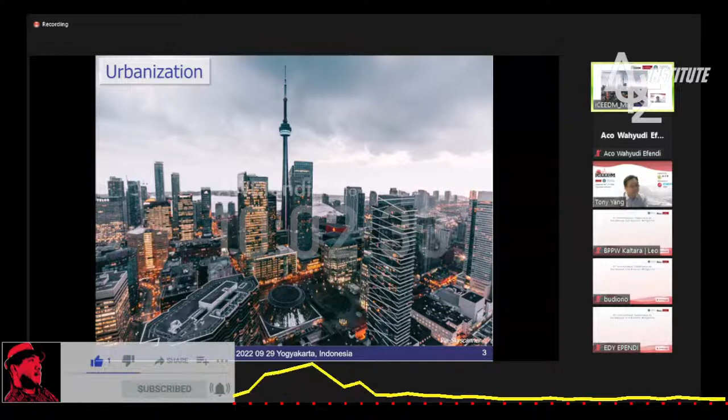My apologies, I'm seeing quite a delay in terms of speed. Is it from the internet, from your side, or too many people on Zoom? Whatever I'm sharing isn't immediately shared with you, not sure why. Are you still seeing the picture of Toronto? Yeah, I could see the city and also the bridge. Yeah, so it's very strange. Oh, you can see the city with the bridge. Okay, so this is Vancouver then, finally.

With so much population growth worldwide, we're expecting to see a lot of new infrastructure needed to be built. It is expected about 2.1 trillion square feet of new construction will need to be built by 2050.

For many of us, we don't really use the unit of trillion square feet. Just so you know, Jakarta is about 800 square kilometers, and Singapore is about 700 square kilometers. So 2.1 trillion square feet means we need to rebuild or build 9 Singapores every year around the world for the next 30 years. So there's a lot of construction that needs to be built.

And these constructions are creating global warming worldwide.

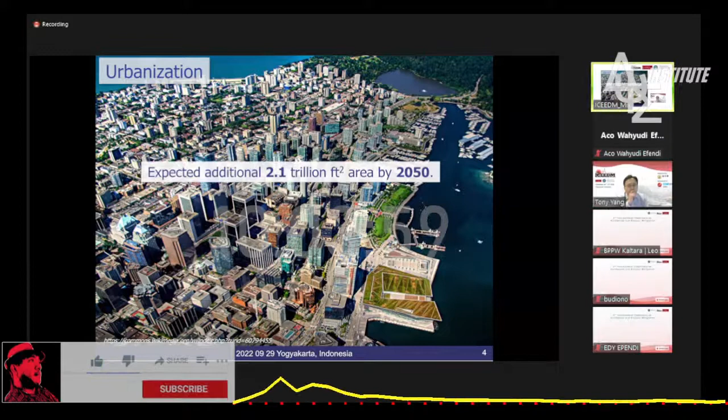I'm going to pause a little bit because it seems like the presentation slide showing up in your conference is slow by a few seconds. I don't know why. I think you're still seeing a picture with the City of Vancouver, right? It's already changed, yeah. You can see it now.

Now you can see the whole world is seeing huge carbon emission growth. You can see United States, China, and actually Indonesia with high production of carbon emissions. These carbon emissions are causing global warming and it's causing issues—we see forest fires, we see a rise in seawater levels.

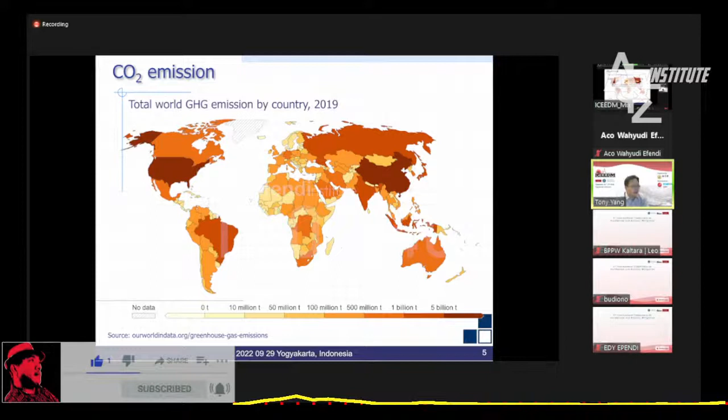So many countries have decided to work together in achieving greenhouse gas emission net zero by 2050. In order for us to achieve net zero by 2050, by year 2030 we need to start cutting carbon emissions by 30%. If we don't do that, part of...

will be under water. In addition to new builds, in addition to the carbon impact caused by that, we are seeing our existing infrastructure in North America deteriorating very fast. Right now, based on our initial research, it costs about 141 billion Canadian dollars to actually replace existing infrastructure rated very poor—we cannot reuse them again. And we need another injection of $11 trillion

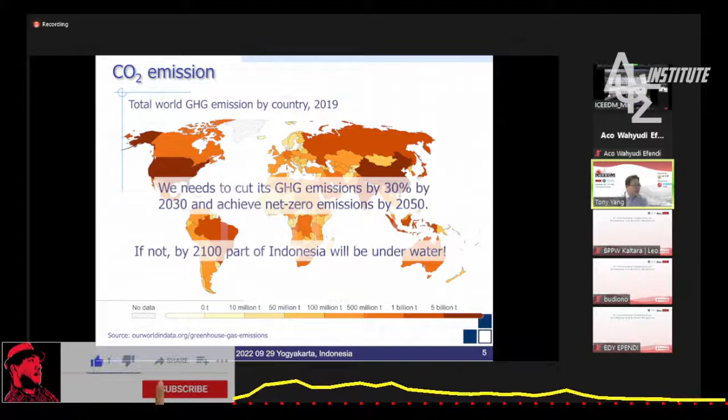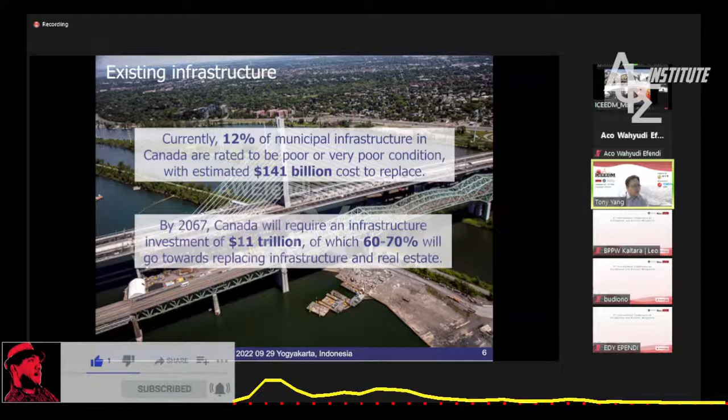for new population growth. In addition to this population growth and maintaining infrastructure, we're also seeing our infrastructure experiencing a lot of financial losses through natural disasters—earthquake, windstorm, fire, flood. We see this all the time.

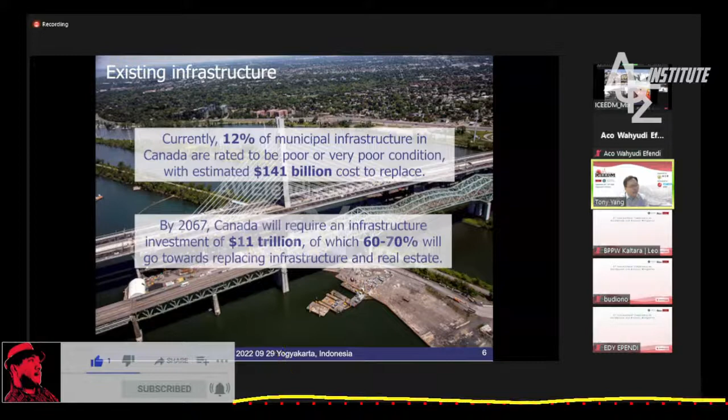Within the period between 1998 to 2017, less than 20 years, globally, loss for infrastructure reached close to $3 trillion US.

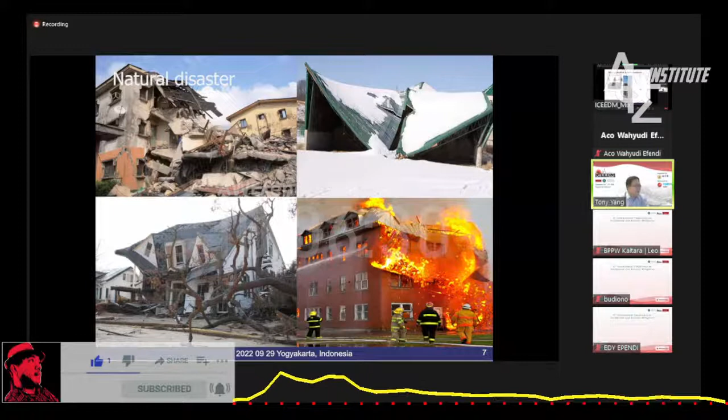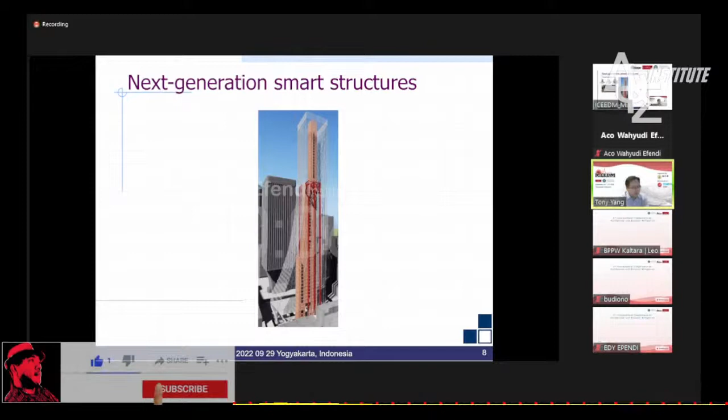So the next generation infrastructure that we're focusing on developing uses new ways of construction. We pre-make those in a factory and quickly assemble on site. We're developing 3D printing technology, reusing material, and using mass timber material to reduce the carbon intensity of new infrastructure.

At the same time, we want to make sure those infrastructures have all the technology we can to make sure they are safe for the next round of earthquakes. So we started developing energy dissipation devices. Finally, we use real-time monitoring, so the next generation infrastructures are smarter, carbon neutral, and resilient.

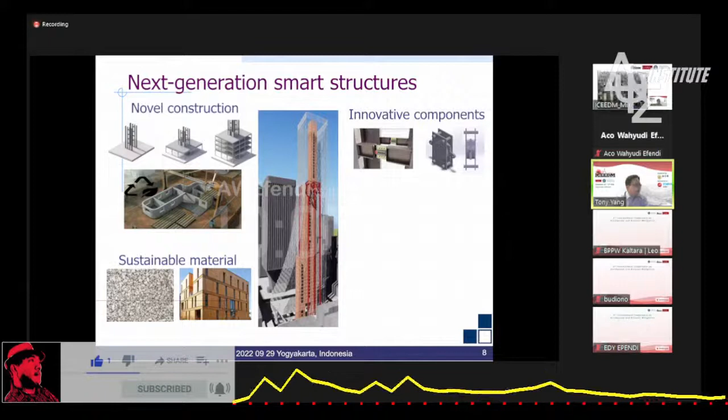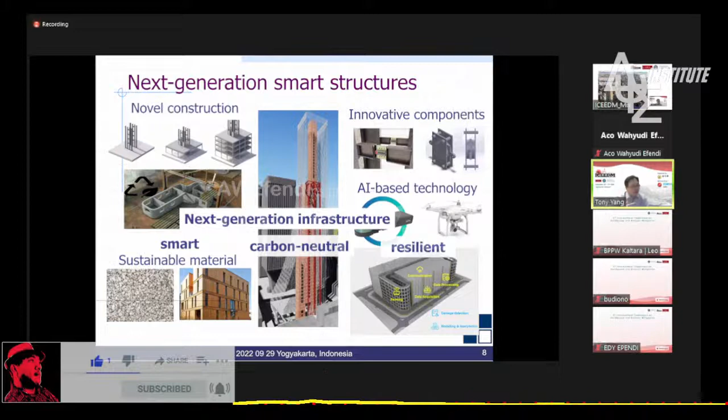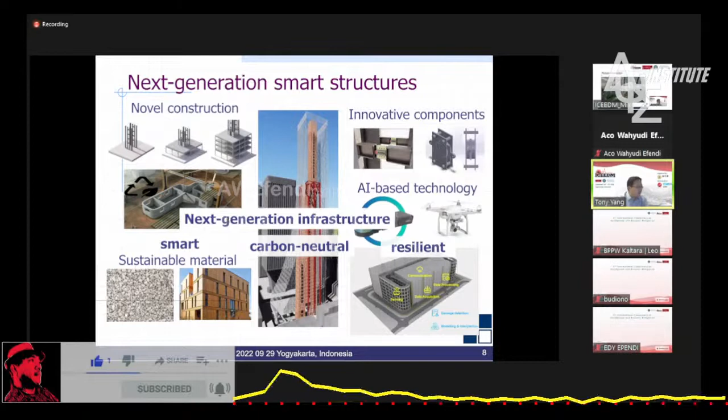So over the last 20 plus years, the world started developing newer ways of building faster to meet global demand. This is a video showing you the technology.

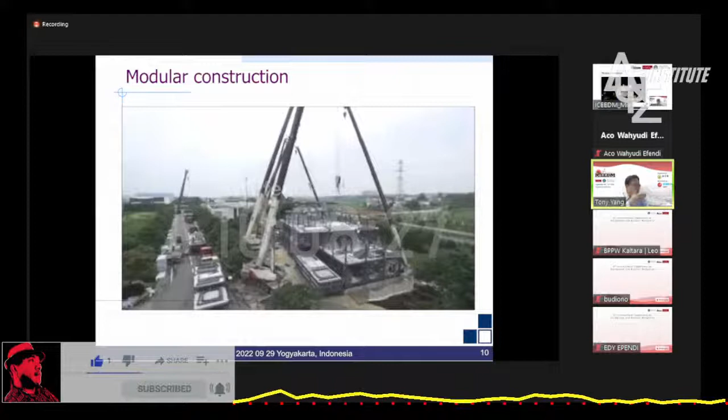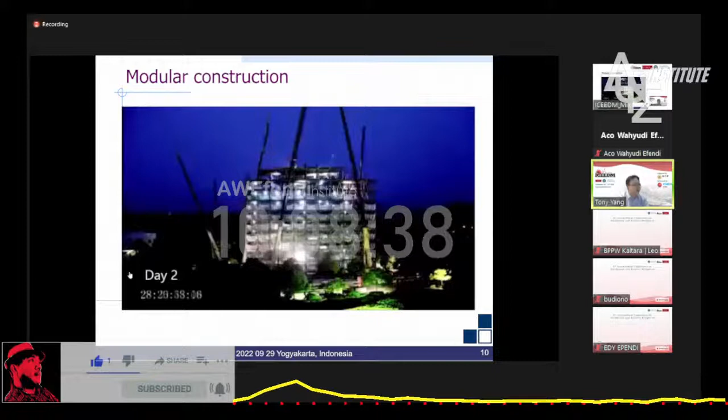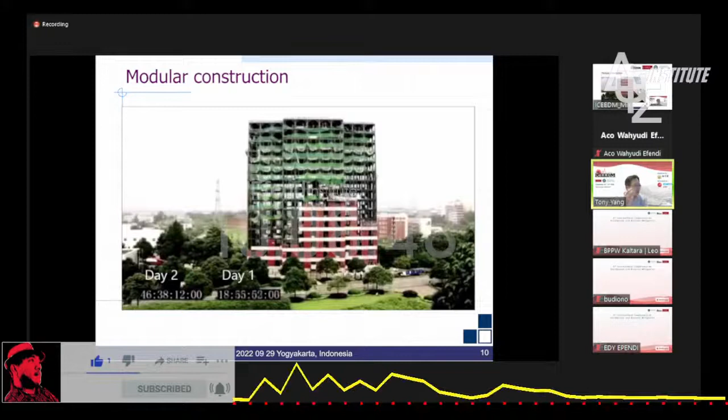Design and assemble the structures together. This is a real-time video showing how fast construction can be built. This is a 15-story building built within 2 days, less than 46 hours—all structural and non-structural components are assembled, the lights are turned on, the water is running, and the furniture is put in.

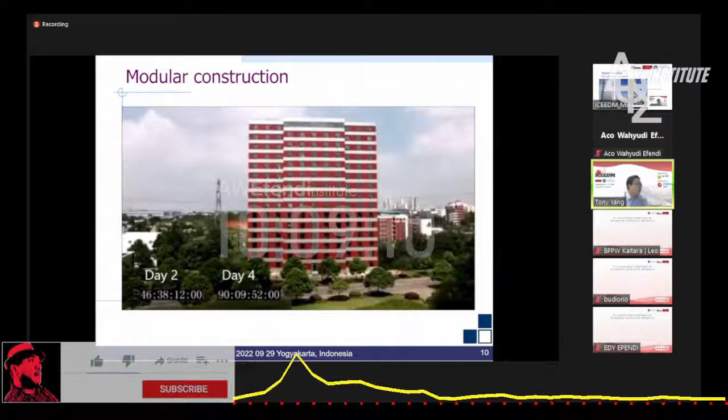This kind of new technology is being heavily investigated around the world. In fact, in China, they are thinking of building the next tallest building in the world, a 220-story structure, using fast construction technology. Right now in China, for modular construction technology, if you don't use it, you may not be able to get a permit to build in a city like Shanghai or Beijing.

So in North America, we're developing fast construction technology. Buckling-restrained knee brace truss moment frame is one of the technologies that we have collaborated on with colleagues around the world. The idea is to use truss systems in regions to create large interior spacing.

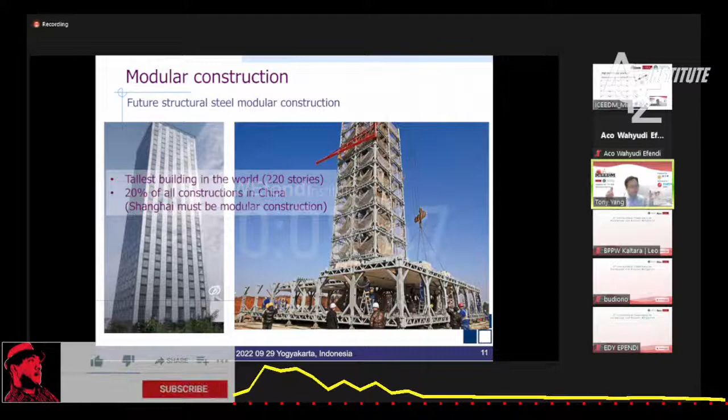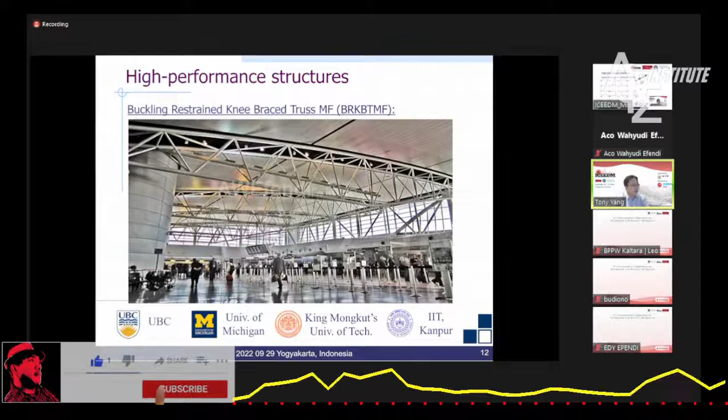To ensure it performs well for earthquakes, we started developing energy dissipation devices to dissipate energy, and we have secondary devices to dissipate additional energy. In the laboratory, we tested many of those devices, and we're working with Star Seismic, now called Brace, to develop those damper technologies.

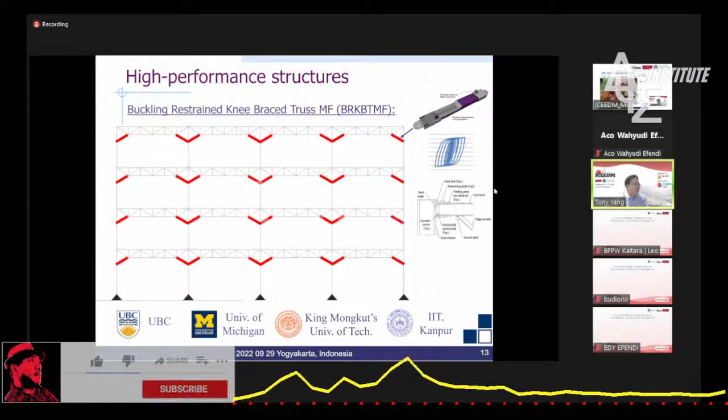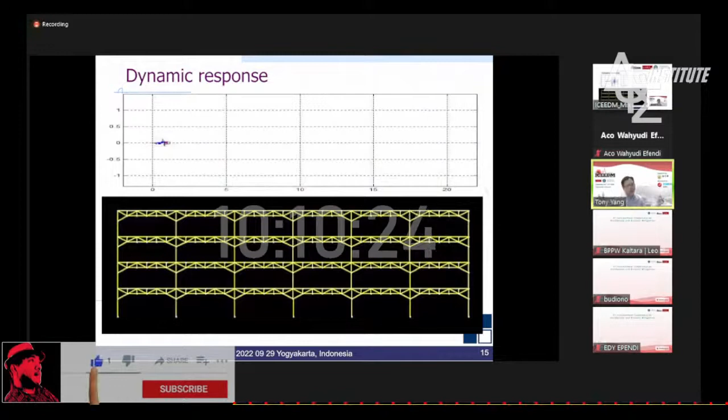We developed a simulation model to demonstrate that the structure can work well during storms and earthquake shaking, so the device can yield and dissipate energy throughout strong earthquake shaking.

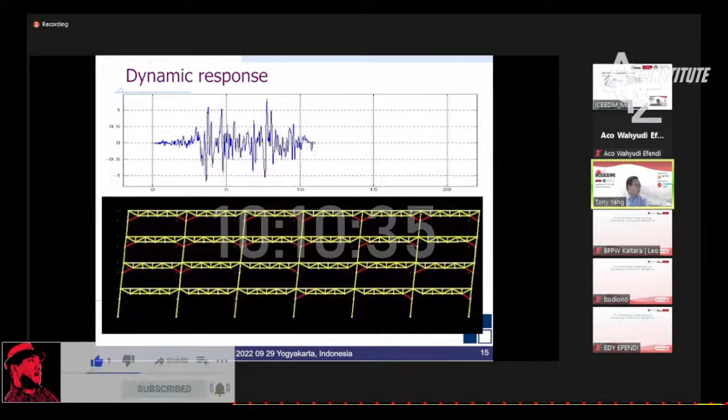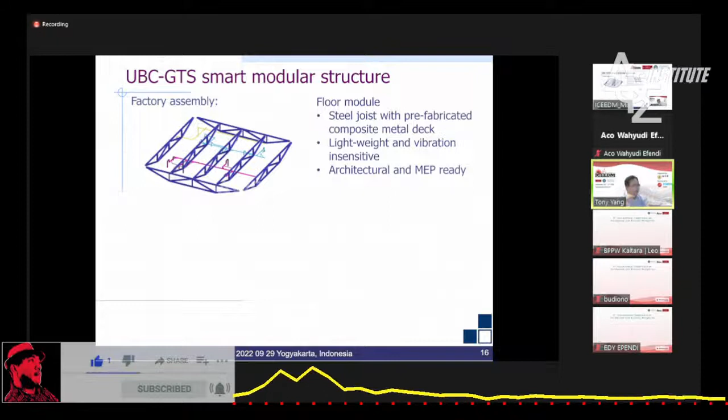After it's done in numerical simulation and experimental testing, the structural system is placed. All the electrical, mechanical, and plumbing systems are put in at the factory. We put in the floor, fire coating, sound insulation, and fire coating on top.

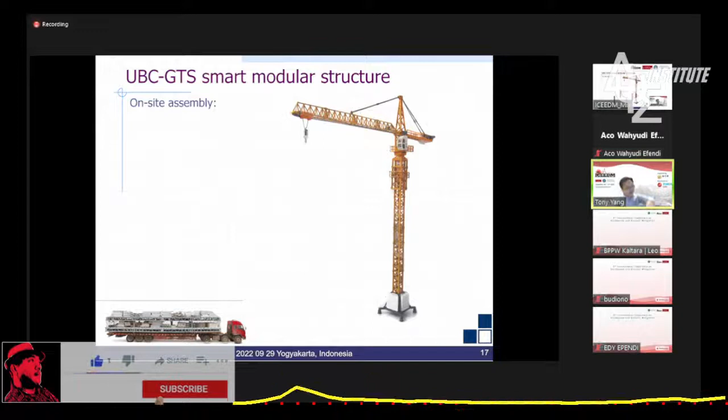Then we can easily ship it to the site. On site, we can quickly place it using a very limited amount of crane and human labor, then place those columns and lift the floor to place, making sure it works for high seismic zones like Indonesia and Vancouver. We started putting in these energy dissipation devices.

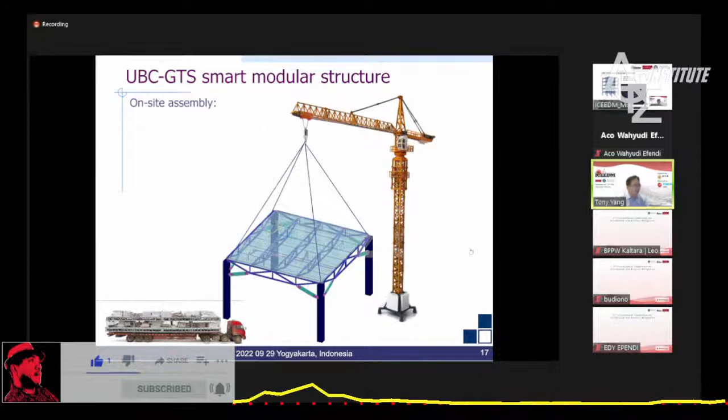The structure system can be very quickly constructed using very limited human labor. The system is very lightweight, very fast to construct, and earthquake resilient, so we can easily deploy it to many locations around the world.

The system can be placed in groups of modules and assembled together, and we can create very large open spaces, no different from this rendering shown on the slides.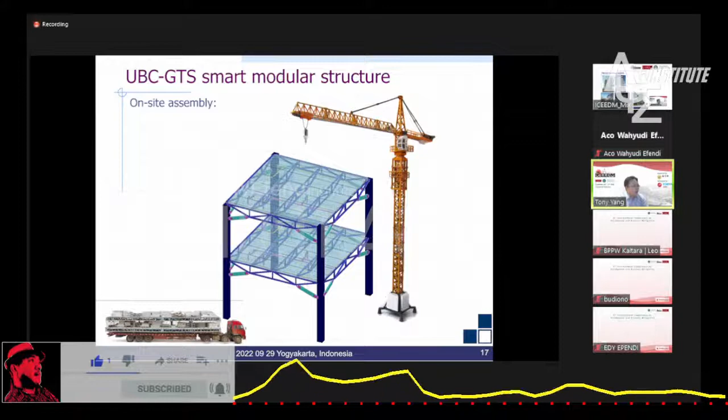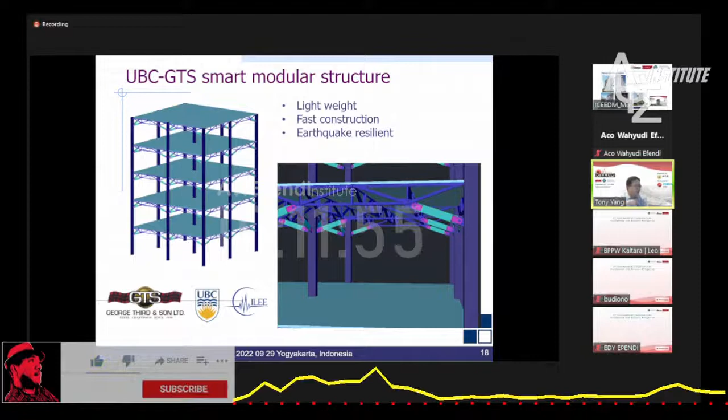The other technology that we have developed here in North America is reusing shipping container technology to build housing, because we have many shipping containers left on the North Shore that we needed to reuse. Our goal is to quickly assemble them so we can solve the housing issues in Vancouver.

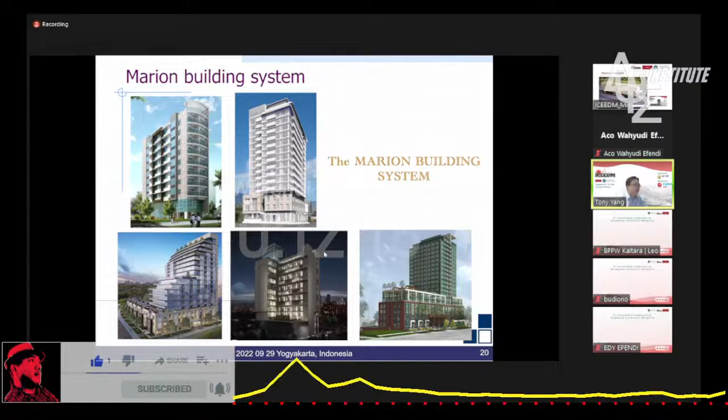So we put the shipping container in the factory. We put in the electrical, mechanical, and the kitchen into the module, and we quickly ship it to the site. To make sure it works for sites, we put the modules on top of each other.

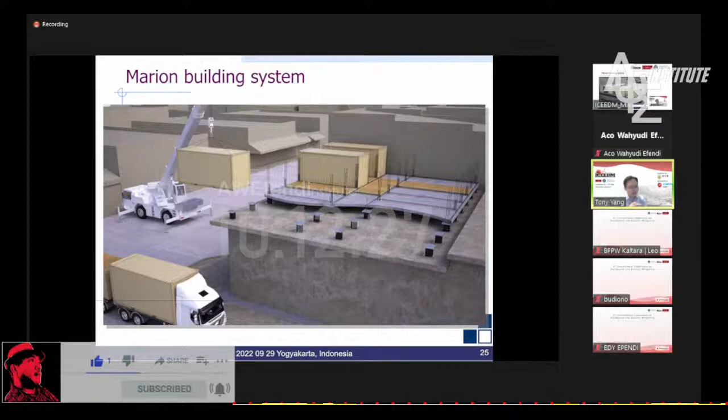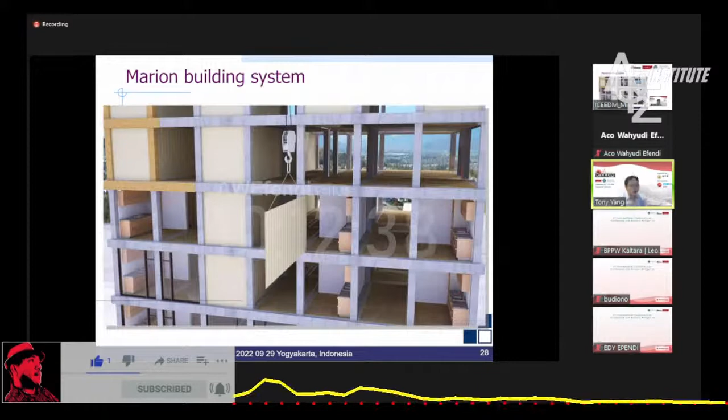We developed a special bonding mechanism between the modules very, very fast, without needing concrete to cure. Those panels fit very easily inside those individual units. They are furnished kitchens with cabinets, water, everything running.

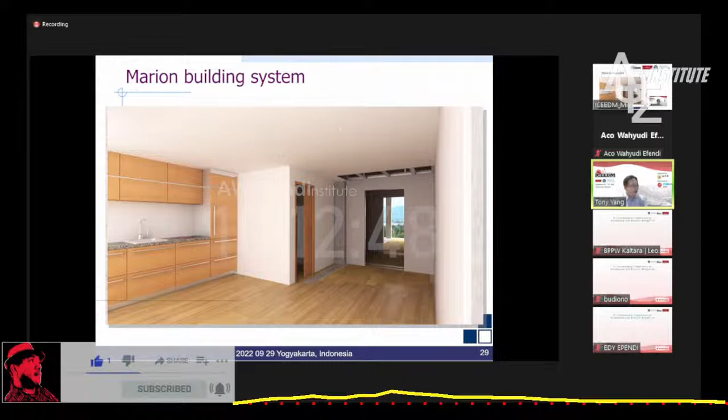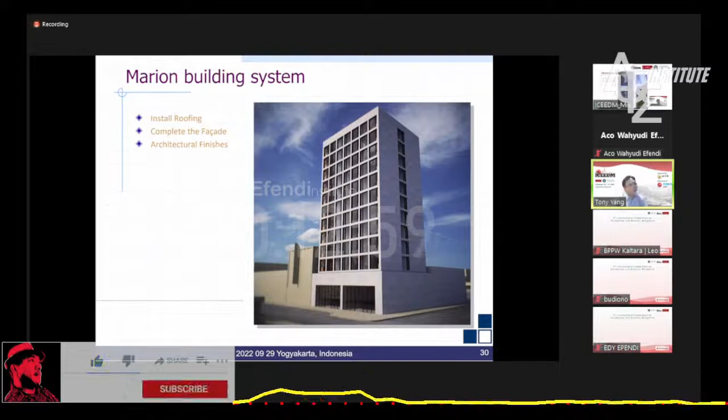So this is the type of construction that can quickly address the housing market. Very recently, just like Indonesia, Vancouver and Canada in general have abundant resources of wood. Canada and Indonesia are both countries exporting wood as a resource.

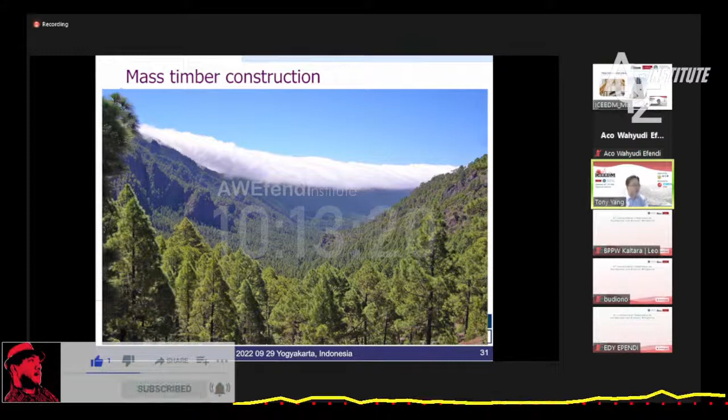Very recently, we started developing high-rise buildings using timber construction. We started engineering the timber, putting it into cross-laminated timber, so we can start reaching new heights. This is one of the tall 18-story timber buildings that we built here at the UBC campus. This is another project in Canada.

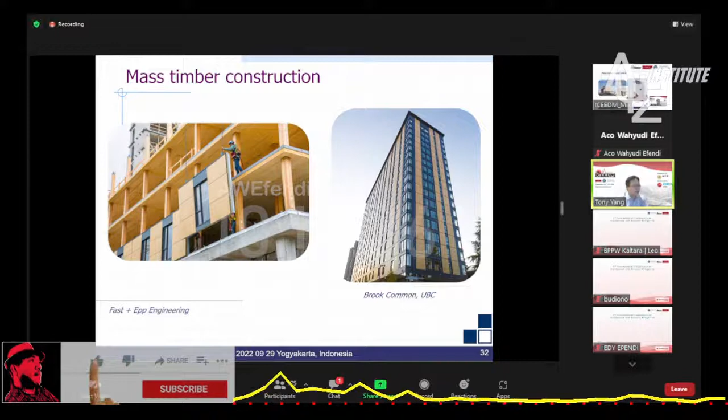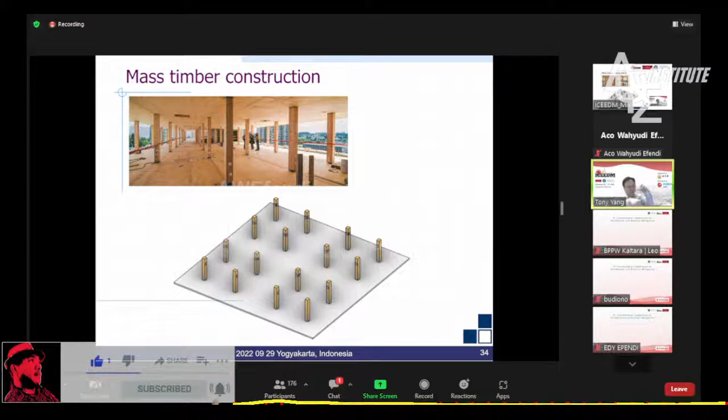The idea of another technology we're developing is timber glulam columns. We can create a DOT floor system, which we can easily manufacture, very light, bring to the site, and assemble.

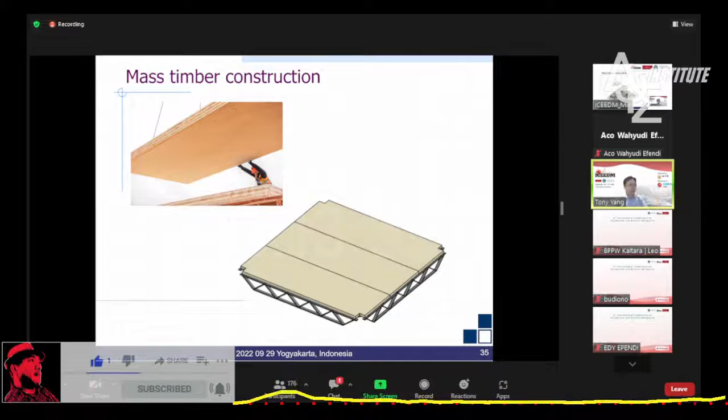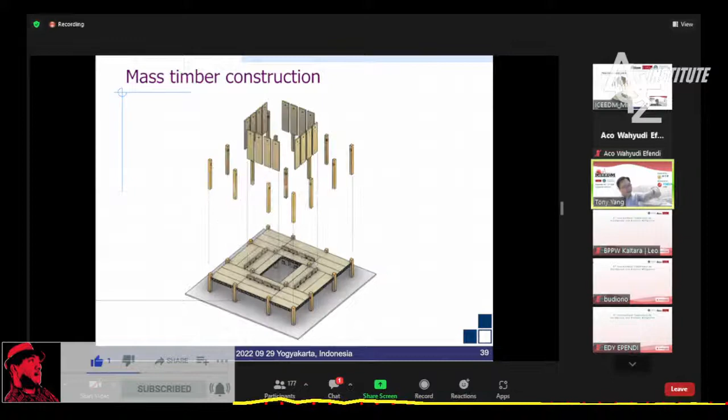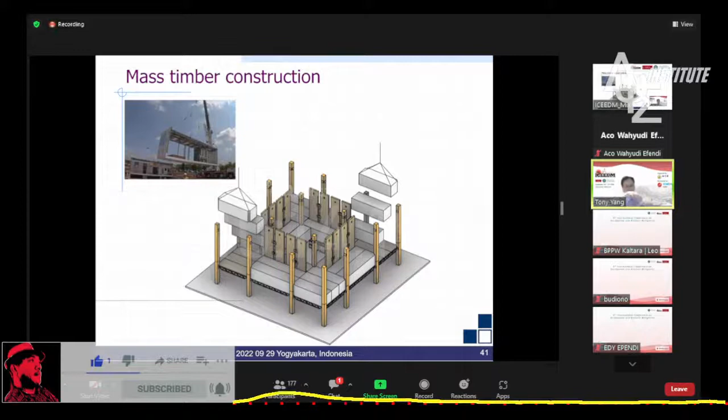After we place all systems into the pre-located slots, once one floor is done, we move to the second floor and continue. For the interior finish, we started developing volumetric modules that we can quickly insert into the building, then start another floor system and continue finishing our high-rise construction.

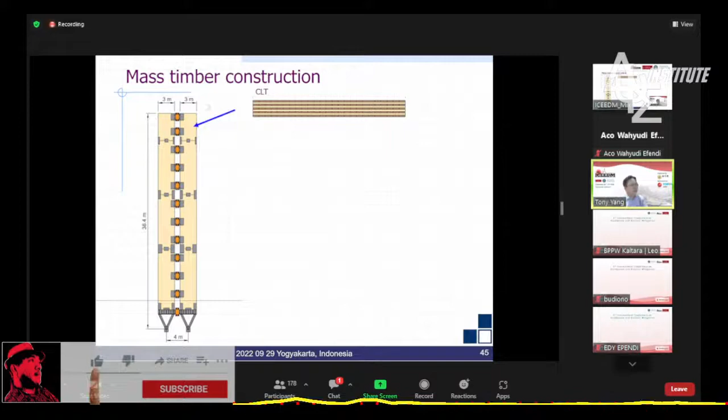Very recently, at this particular conference, we presented the design of a system which uses CLT, cross-laminated timber, with a self-centering conical friction damper that we developed here at UBC, which is damage-free during an earthquake, and will self-center after the earthquake is done, providing very nice, stable energy hysteresis.

At the base, in Vancouver, we started using a lot of pin bases because our architects liked that design.

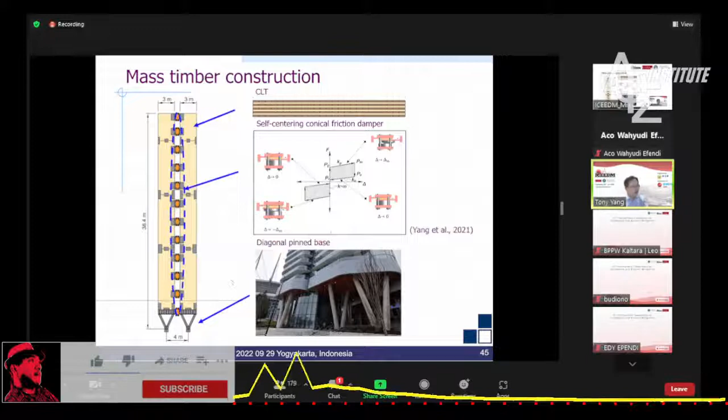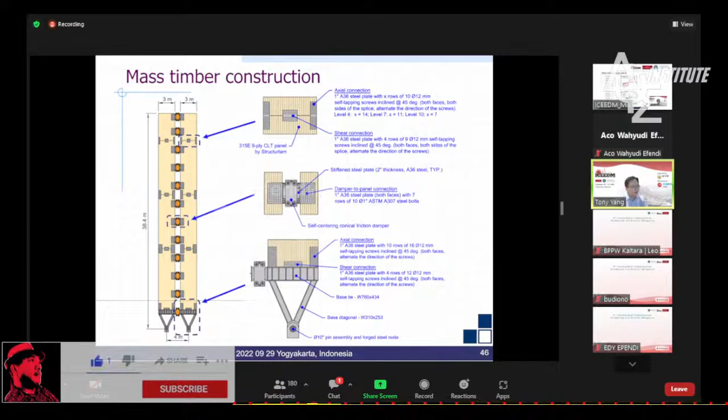We reused them in our design. Here shows some very high-level views of the final design we did. We then developed computer models using OpenSees, to do static and nonlinear dynamic analysis.

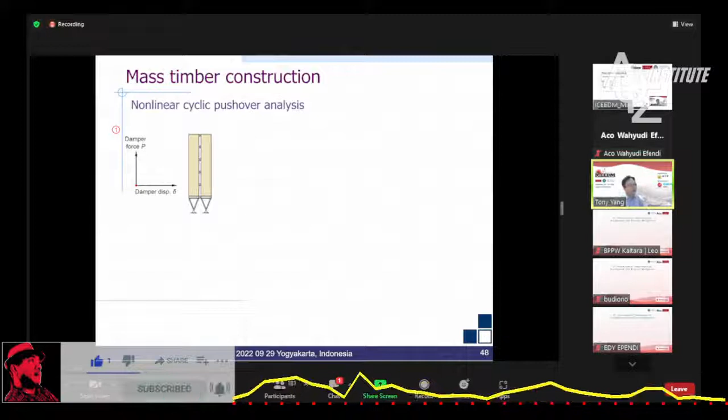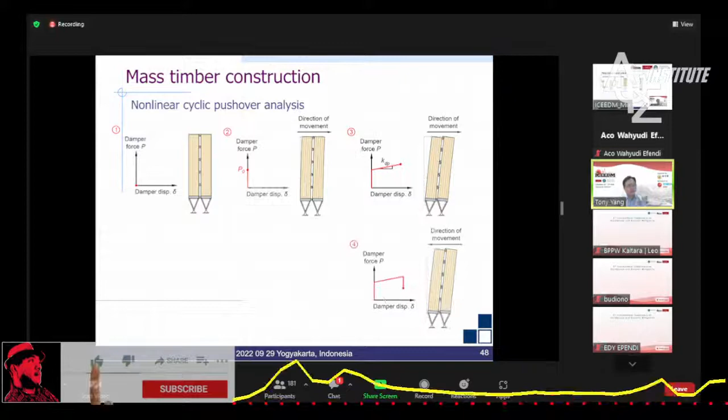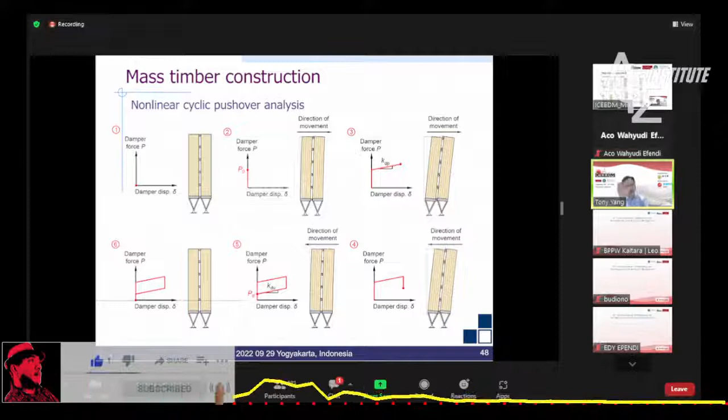In the nonlinear static analysis, we do a nonlinear static pushover, so the structure will actually deform, and the energy dissipation devices will pick up the forces. If loading continues, the devices will slide through the friction devices and dissipate energy. If the earthquake returns, the devices will have a self-centering force to bring the building back straight without repair required. So after the nonlinear static pushover and cyclic pushover analysis, we then do nonlinear dynamic analysis.

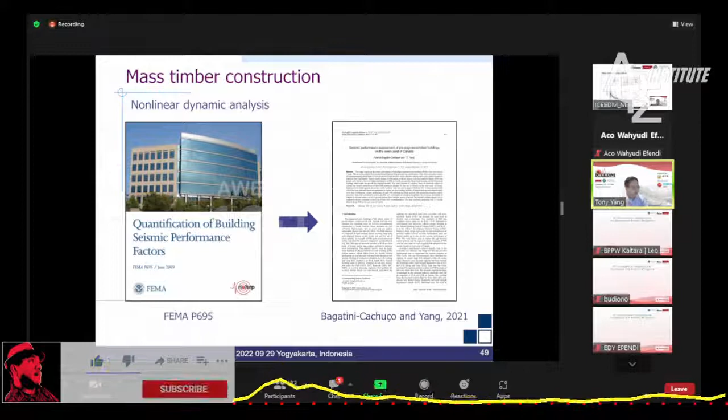We do lots of time history analysis using incremental dynamic analysis procedure. We select a whole bunch of ground motions suitable for the particular site, which is in Vancouver. The time history analysis demonstrated the energy dissipation device was able to dissipate energy and come back plumb without any residual displacement. From the large array of nonlinear incremental dynamic analysis, we pushed and increased the level of shaking until the structure reaches yielding in one of the devices, without allowing the failure mode.

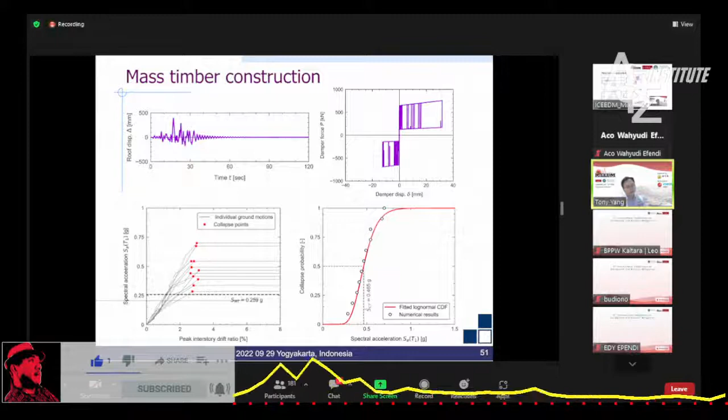By doing so, we can quantify the performance of the building using probability of collapse. In that situation, it's actually not collapse—this is a failure probability. Based on the study we show, the structure has a collapse margin ratio of about 1.79.

So what it means is that at about 50% of its capacity, 50% of the time, the median capacity is actually about 1.8 times its design level. If you account for the spectral shape factor, the adjusted collapse margin ratio is about 2.27. So very, very robust compared to the acceptable collapse margin ratio.

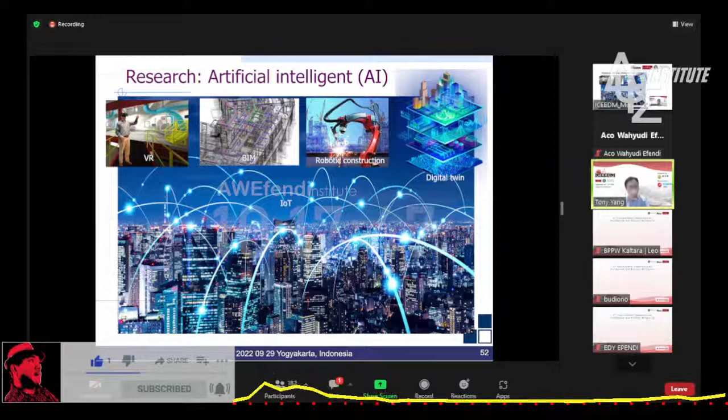This superior system actually performed very well according to the North American code. Very recently, with the advancement of AI technology, we started working heavily on making this kind of new structural system be built using robotic technology. We started developing virtual reality technology, building information technology, robotic construction technology, and digital twin technology to allow us to make those buildings without much human intervention.

So we are starting with the structural design, but now we have integrated it with our virtual reality model, so we can actually see everything before it's being built, and we are developing our robotic technology to assemble those systems.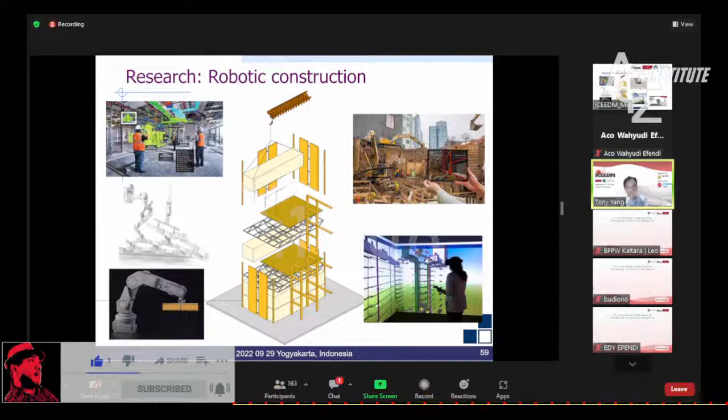Yeah, so now let me give you some quick summary and conclusion.

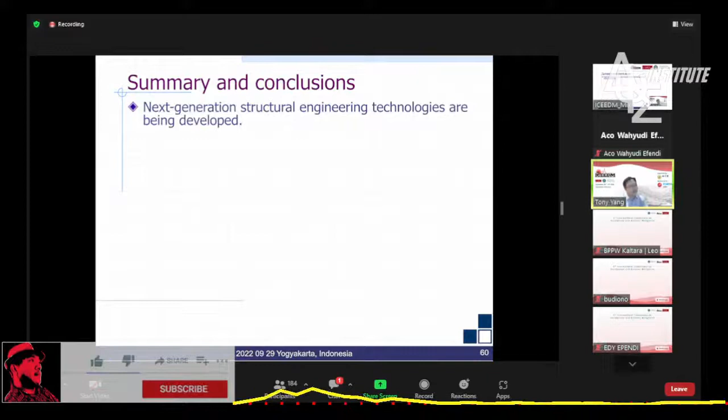Next generation technologies are being developed, and we're making the next generation of structures lower initial cost, faster to build, higher performance, smarter, and environmentally friendly.

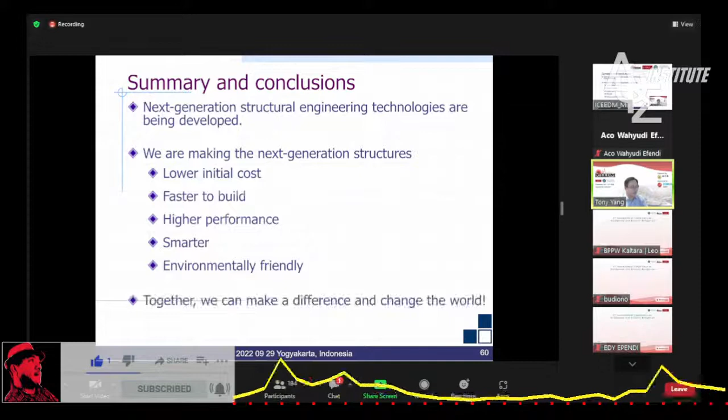I'm very sure, together with our colleagues in Indonesia and around the world, we can make a significant difference. With that, I would like to thank you for your attention and look forward to the opportunity to welcome you all to beautiful British Columbia, Vancouver, and hopefully have the opportunity to meet my close friends in Indonesia again very soon.

I'm done with the presentation.

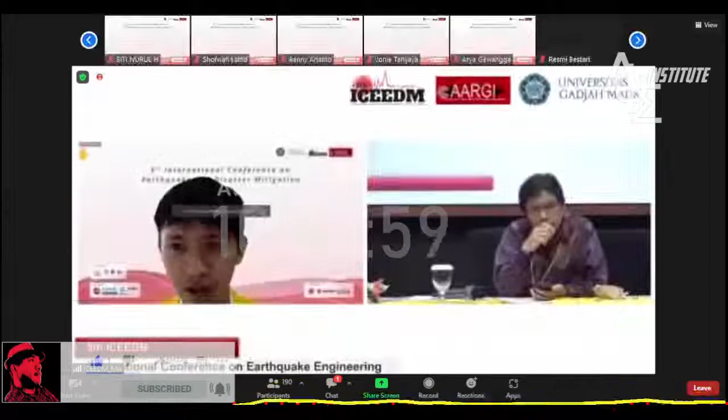Actually, I'm really impressed with your presentation, Professor Tony Yang. I want to ask about your opinion. I've heard about the high-rise building in Helsinki, Finland, where all the material is from wood.

Hello, could you—your voice is not very clear from here. Could you—I'm not sure whether Professor Yang can hear clearly. It's not clear to me too. Yeah, not very clear. Could you... How about now? Can you hear my voice clearly?

Steven, if possible, can you type it in the chat? Maybe I can answer it, and I can repeat your question.

I want to ask about your opinion about the high-rise building in Helsinki, Finlandia, where all the materials are from wood.

Steve, I didn't hear that very clearly. I heard about high-rise building, can you repeat again? I want to ask about your opinion about high-rise building in Helsinki, Finlandia, where all the materials are from wood. Can you type it? What is the problem? All the materials are from wood.

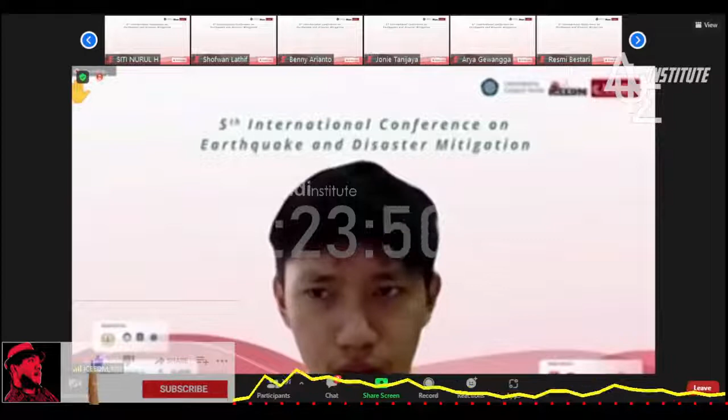Can you write your question on the chat? Yes, wait a minute, not yet. Materials. Oh yes, I want to ask about high-rise building in Helsinki, Finlandia, where all the material are from wood. Okay, so what's the question? Maybe you can read also from the chat. But the question is, I want to ask about high-rise buildings in Helsinki, Finlandia, where all the material are from wood. Yeah, but what's your question? Are you saying that it's possible, or what does that question mean?

So my opinion, whether it's... you just give your opinion about the high-rise buildings in Helsinki, okay.

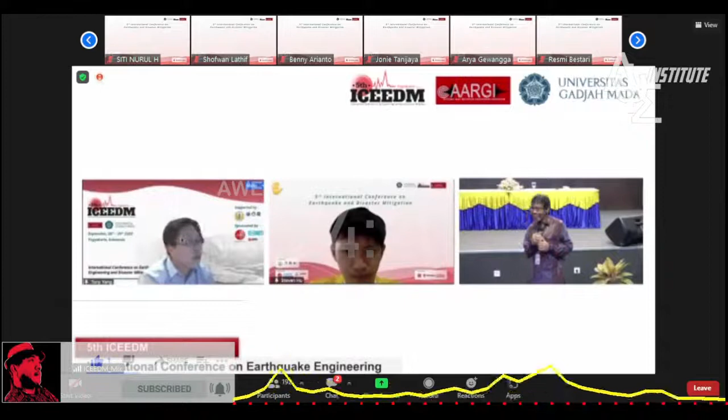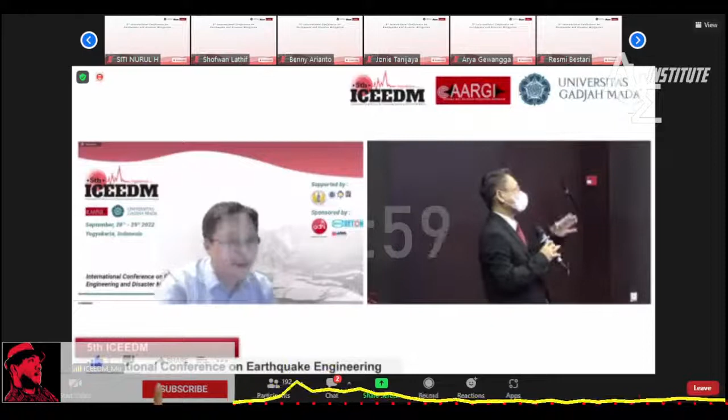Steven, I am not familiar with this particular country. We have design codes, we have construction guidelines that we have to follow. So how do you initiate this situation? Suppose in Vancouver you start to build this kind of innovative building - do you need any permission, or permission from a kind of peer review or something like that at every region that you want to build your creative building? Thank you very much.

Thank you, Professor. Okay, Professor Yang, you could answer. Yeah, Professor Suhendra, thank you for the good questions.

We are pushing on the boundary of technology, and every time a new technology is made, it's always creating challenges in the way we implement them. So in North America, what we have been doing is peer review for this kind of structural system. The peer review requires experts like yourself or myself who are experts in the material level, the structural level, the ground motion level, and the modeling - a group of peer reviewers will review projects like this.

As a matter of fact, in the United States, almost all buildings, even made with traditional technology, are going through peer review these days because it all breaks the height limit of what the code is doing right now. But I believe that's where the future is going - where the building code stops giving you detailed guidelines on how every building needs to be designed, and instead gives you targeted performance, how the building needs to achieve. And you as an engineer, and there are many great engineers around the world, are able to design the building to achieve the performance you want. Hence we are moving towards this performance-based goal of a new structural system. I hope that answers your question.

Okay, thank you. I think you have answered the question very well. I think because of time, we have to finish this session. So let's give a big applause to Professor Yang.